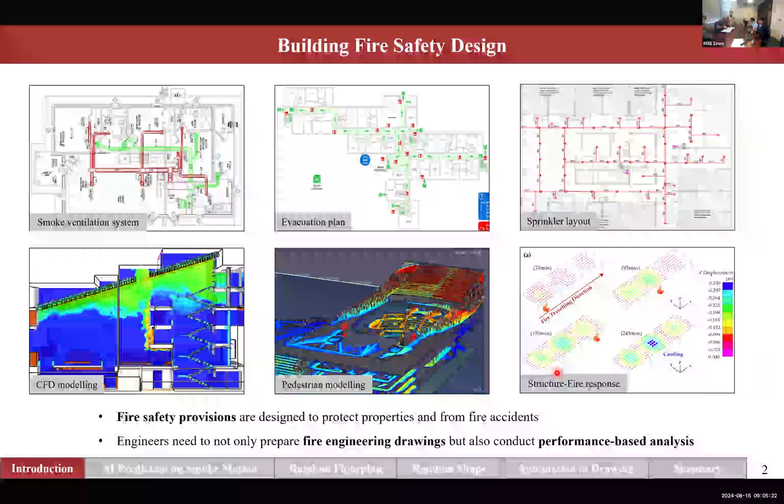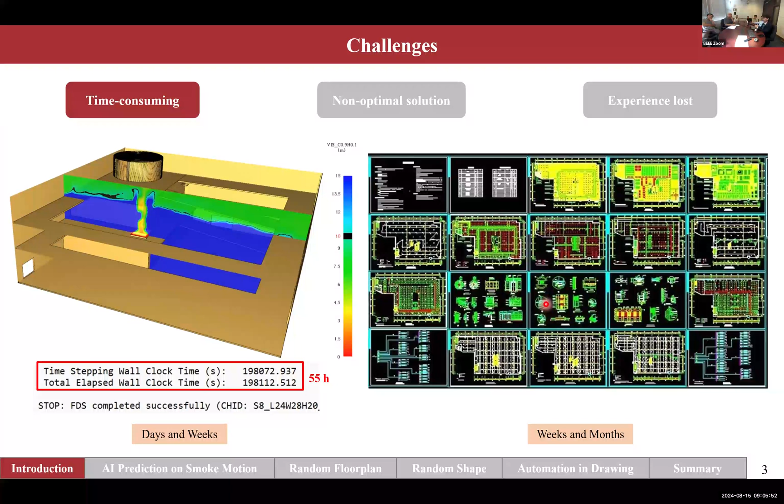So far, there are a lot of advanced computational tools which can help us to conduct the design process. However, there are still a lot of challenges. The first and foremost is that the current design stages are very time consuming. For example, if we simulate a fire development of 20 minutes, it may take a few days to get the result, and sometimes even weeks. And it takes even more effort for the engineers to prepare all the sets of fire engineering drawings. Therefore, the current design is extremely time consuming.

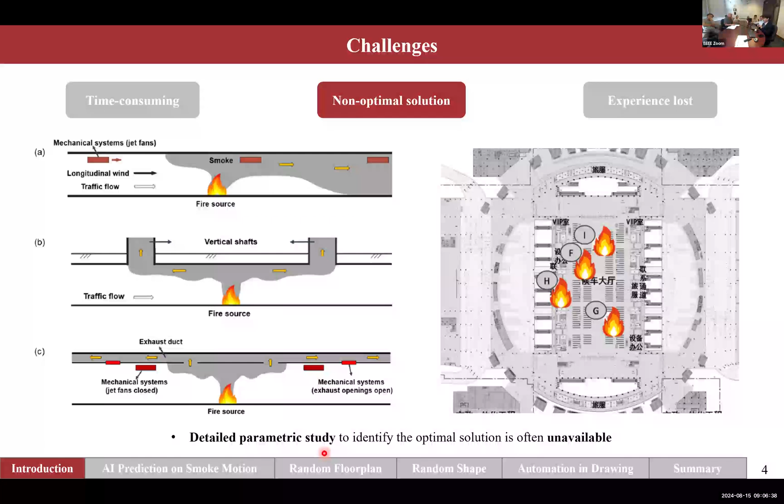And the second challenge is that the fire safety assessment can be affected by many factors. For example, what ventilation strategy has been adopted in our design, or what is the assumption of our fire scenario, like the location of the fire, the heat release rate curve, etc. So there are many factors that can affect the assessment result, but due to the time-consuming nature, in most cases engineers are unable to perform a detailed parametric study and define what could be the optimal and most effective fire safety management for our building. So therefore, most of our designs are not necessarily the best.

And the last challenge is experience loss. You can imagine how many fire simulations are done every year in the world, and how many drawings are prepared. These drawings and simulation data are very valuable. There is much engineering experience and insight inside. But unfortunately, all this data is just singly used. So basically, after we finish one project, all this data just stays in your computer folder, and some of it is never opened again.

And the next time we encounter a new project, even a similar one, we have to go through all this time-consuming design process again. That will cause a lot of repeated workload. And moreover, all the experience and insights are not really shared by the whole fire engineering community. So therefore, we have to train the engineers again and again, generation by generation.

So to address all of these challenges, we are calling for a smarter and more automated design process. And AI could be a promising tool to address these challenges. Basically, the feature of AI is that it can learn from historical data and map the relationships between input and output. And after training, it can provide predictions with intuitive judgment in just seconds. So it has a feature of real-time prediction, and that could potentially help us speed up our design process.

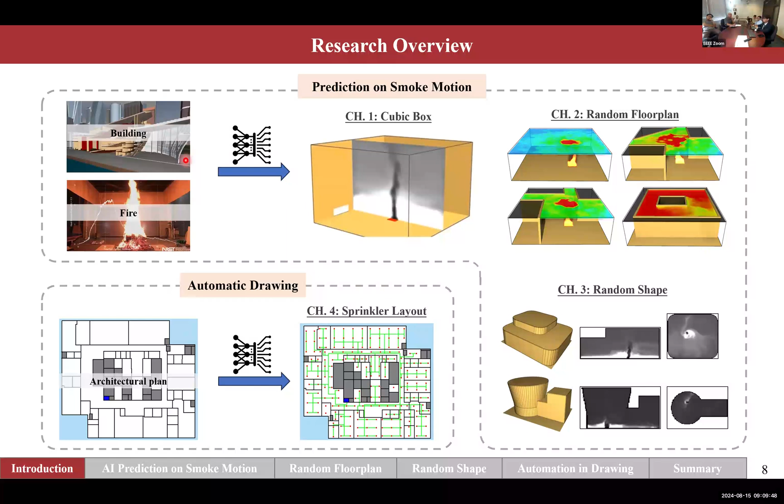In my 3-year PhD period, I have done a total of 4 works, which explore the possibility of using AI in fire engineering design. We start from the prediction of smoke motion, which is very important for performance-based analysis. In my first work, we tried to see if AI can predict the smoke movement and smoke layer descending process in a cubic shaped atrium. After that, we upgraded our AI model to address rooms that have different floor plans. In the third work, we further upgraded our AI model to see if AI can make predictions for random building shapes. And in my last work, we explore whether AI can help us prepare the fire engineering drawings. So that is the overview of my research.

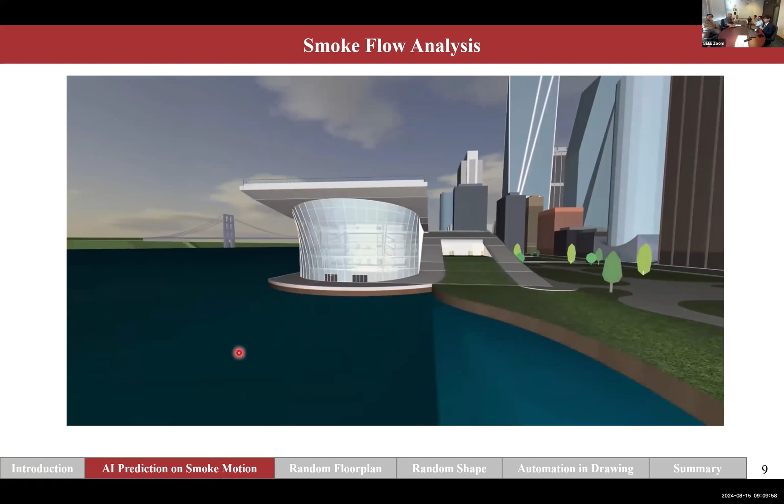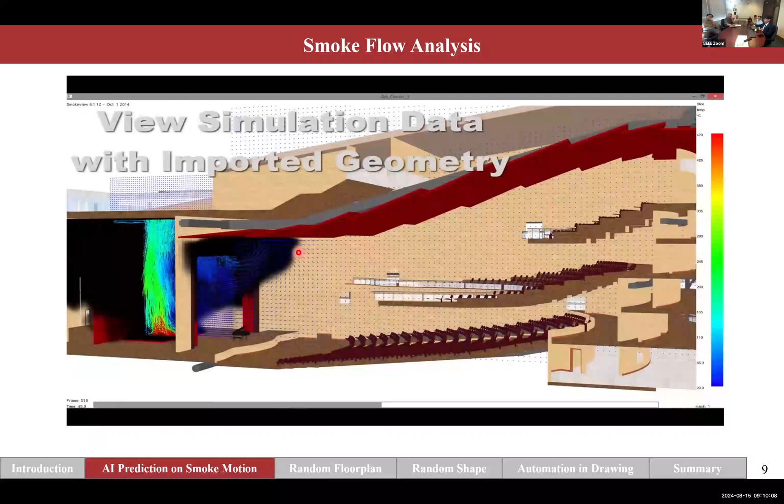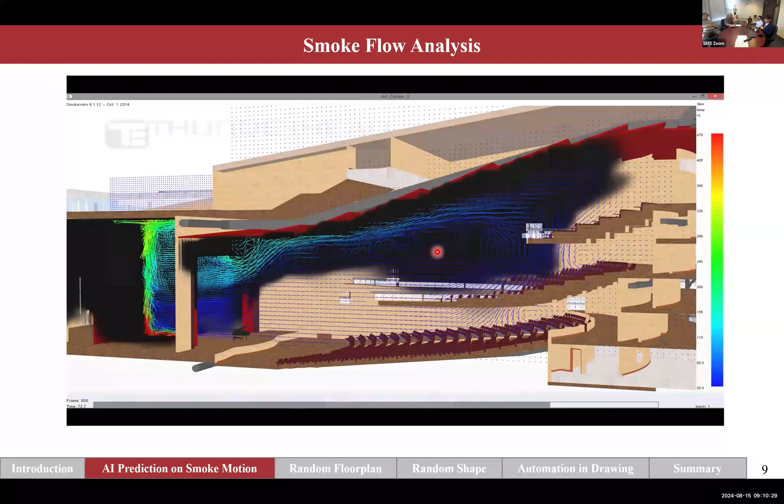And now let's dive into the first one. When we design a building, as designers and engineers, we wonder what would happen if a fire occurs in the building, like how fast the smoke will spread and how high the temperature will rise, etc. That kind of process today can be modeled by advanced CFD modeling, such as FDS, Fire Dynamics Simulator. However, as I mentioned before, these computational tools are very time consuming in terms of simulation time.

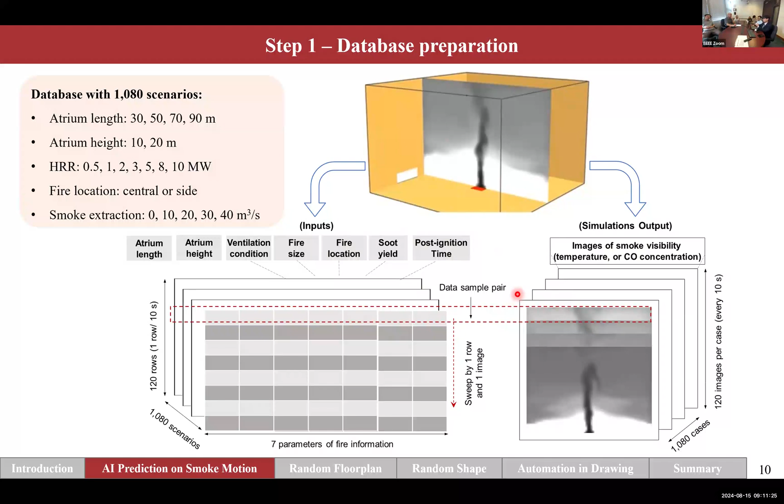And back 3 years ago, we were trying to see if AI can speed up the process. At that time, we had no experience and were not confident whether AI could really make accurate predictions. So we started with a very simple geometry, just a cubic shaped atrium. But we still established a very extensive database with over 1,000 fire scenarios, which cover different atrium dimensions, heat release rates, fire locations, and ventilation capacities. Basically, we labeled all the design inputs with smoke images, including the visibility, temperature, and CO concentration at specific time steps, and tried to see if AI can get the relationship between them.

So the specific AI model we used here is called TCNN, the Transpose Convolutional Neural Network, because we are trying to make a translation from 7 design parameters into an image. So basically, it was a very typical upsampling task which the TCNN can perfectly address.

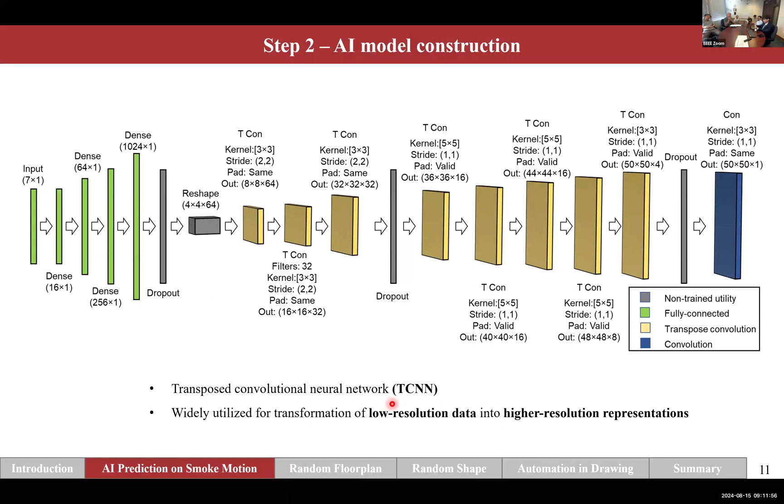And after training, we're asking AI to make predictions for some new cases. So here is a very typical case we selected from the testing data set. The first row is the prediction of smoke movement by the CFD, and the second row is the AI prediction. We also present the visibility, temperature, and CO concentration results, and they are presented in video format.

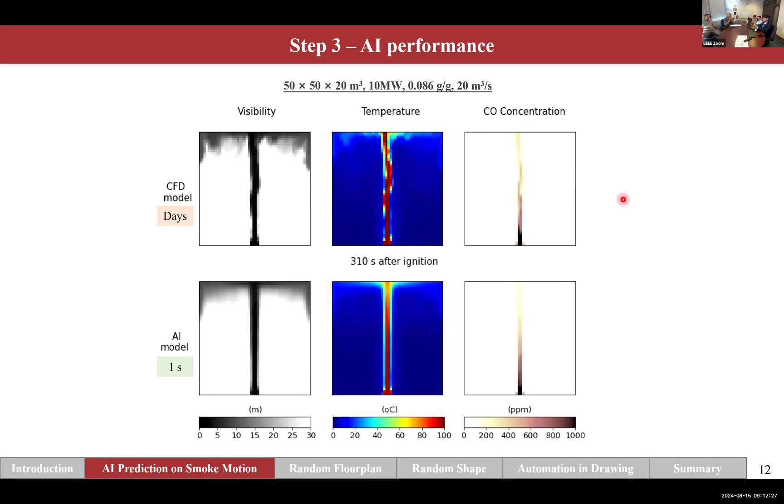So basically, you can have an overall impression of how similar or comparable the AI result can be to the CFD. And again, CFD may take a few days to get such a result, and AI just 1 second, 1 click. We're also trying to see more results. So we found a benchmark case, again from the testing dataset, and we tried to apply different soot yield, heat rate, atrium height, etc.

And what we feel is that the AI just works like a non-linear fitting of all the input parameters to the output. Basically, if it has seen the case with a 10-meter height and 20-meter height before, it can give a fitting result with 12 and 15 meters. So with this real-time feature, as engineers, we can perform very detailed parametric studies.

And to further showcase the capability of AI, we developed a software which we named the Intelligent Fire Engineering Tool, IFE tool. And we also made it open access on the internet. So let me just open the, yeah, I just wonder if you can see my webpage.

So basically in this interface, what a designer or engineer does is just fill in all the information about the building and fire. For example, we have a building with 49 meter width, height perhaps 17. I just type them randomly here. Fire size perhaps 4.5. We got the fire inside near the wall. Soot yield perhaps 0.07. We have ventilation capacity of, let's say, 25. Smoke clear height, let's say 3 meters, and just one click.

Then you can get all your results, the smoke images. You can also check what the smoke development could be at perhaps 20, 200, or 500 seconds. And you also have the smoke descending profile, which can be compared with your predefined smoke clear height. Then you can have the available safe egress time, which is quite an important parameter when we're doing the design assessment. You can also check other tenability criteria like temperature as well.

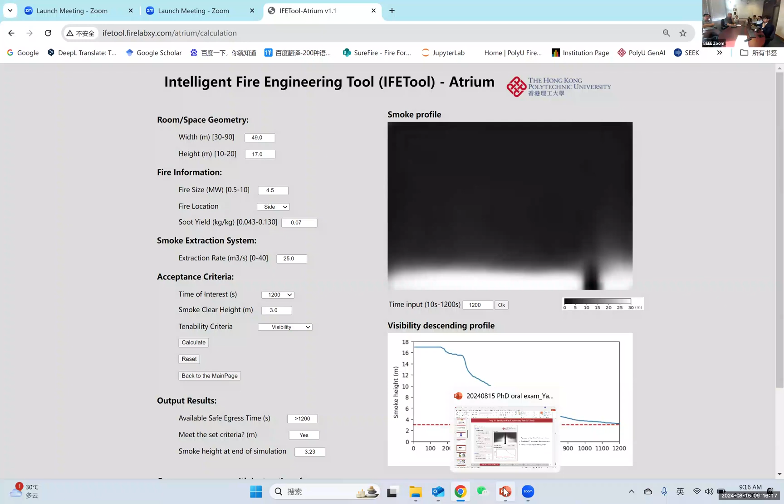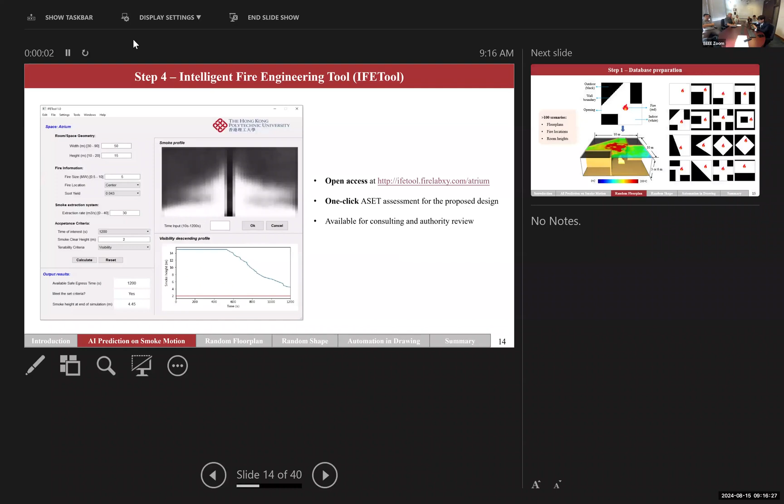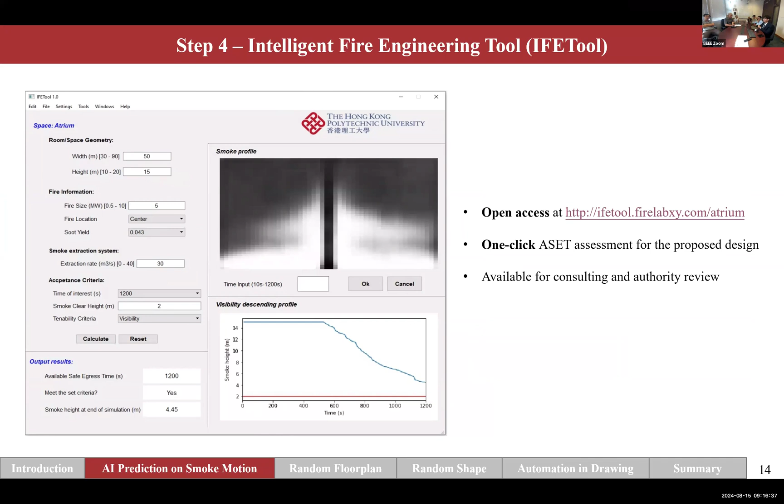And of course, with this successful try, we have our second work, where we are trying to see if AI can make predictions of fire in different rooms or rooms with different floor plans. So here we labeled the room floor plan with an image, where the white area is the indoor room area, and the black area is the outdoor area.

So we put our floor plan in this kind of image, and the right side shows some examples of our database. So basically, we built all different kinds of shapes like L shape, corridor, T shape, cross shape, etc. And also we have the triangle corner or enclosed rooms, etc. So basically, we have over 100 fire scenarios and feed all this data for AI to learn.

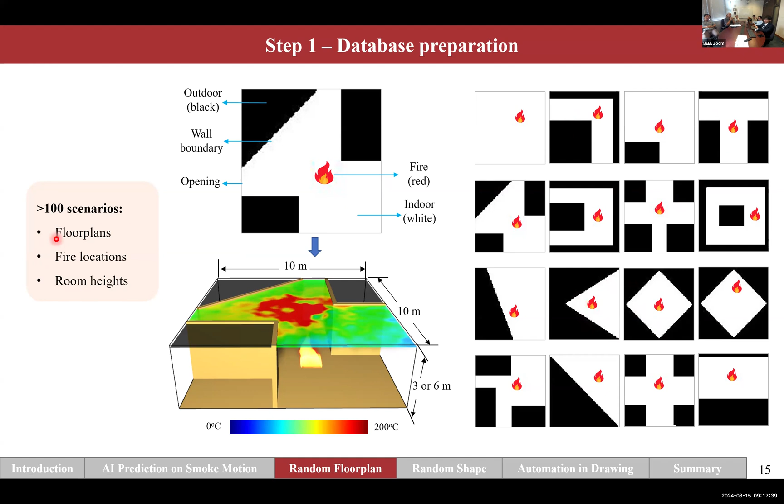So basically, for the AI model construction, the input in this work is, of course, the floor plan of the building, of the room, and also the location of the fire, and also the heat release rate curve of the fire. So we feed it to the GAN model, which is very famous for its outstanding performance in image generation. And the output would be the temperature, velocity, and soot density fields under the ceiling.

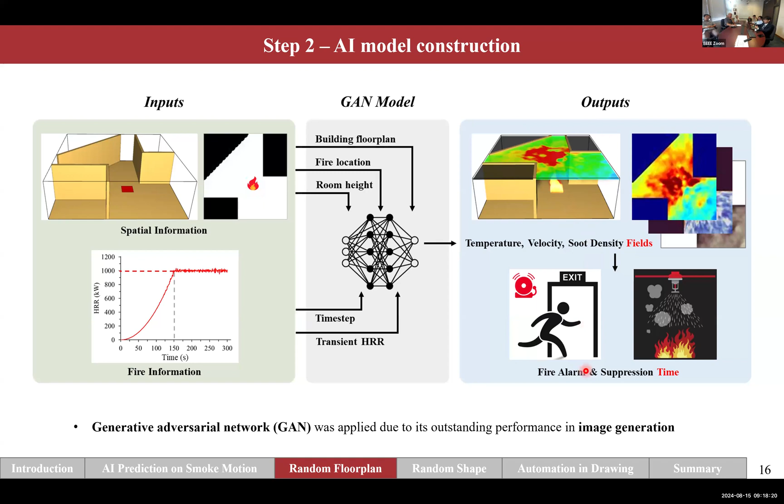And with all this result, we can conduct a performance-based analysis in terms of fire detection time, which I will mention later. So basically, this is a demonstration of our AI result. And we select 3 typical cases. One is the open floor scenario, which means there are no surrounding walls. The second one is semi-open with both walls and openings to the surroundings. And the third one is a totally enclosed scenario.

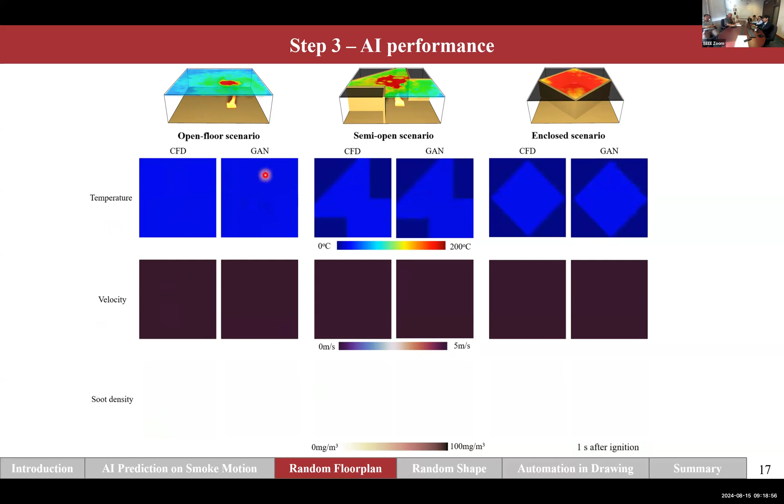So we have a result presented with temperature, velocity, and soot density. And for each case, the left side is the CFD result, and the right side is the GAN result. So basically, we can still find a good agreement between CFD and GAN. And again, CFD takes a few days to get that, while GAN just a few seconds.

And with all these ceiling fields, we can do a detailed fire detection analysis because most of the sprinklers or detectors are installed under the ceiling. And once a fire happened, if we have an accurate estimation of the velocity or the gas temperature of the smoke layer, we can make prediction for the detector activation time, which is quite important for not only the design assessment, but also the sprinkler placement and fire investigation.

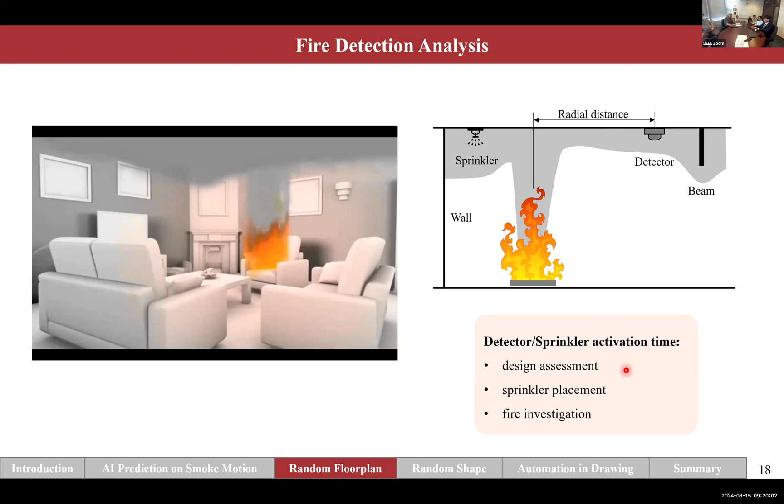So one case study is that if we got this kind of fire case and we know where the detector is located, we can plot the curve of the temperature and the velocity rise with the time. So in the plots, the gray lines are the CFD result, where you can see a very severe fluctuation, and the black lines are the GAN result, which is aligned to the CFD result. And for the predicted detection time, we can achieve accuracy of 95% on average.

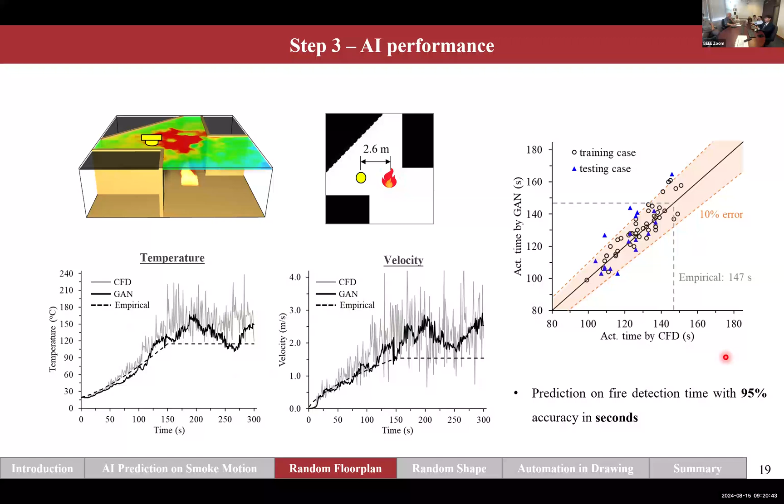So that could be another successful try and give us the confidence to take a further step, addressing the 3D-based prediction, because we know modern buildings have all different irregular and innovative building shapes. We are trying to see if AI can make predictions for the random building shapes.

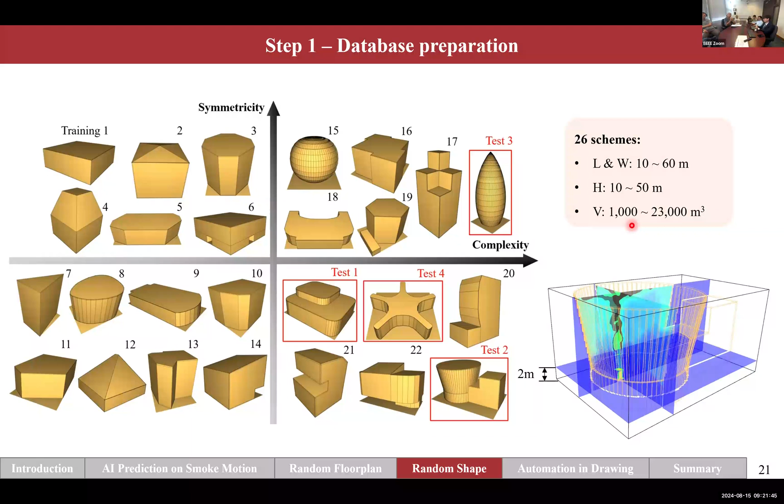And to achieve that, we, of course, go back to the very first step to prepare enough database. So we have basically the atrium designs with different shapes, and ask AI to learn how the fire and smoke can spread in all these different geometries. The volume of our database ranges from 1,000 cubic meters to 23,000. So for the AI model construction, the input of our AI is, of course, the shape of the building and also the location of the fire.

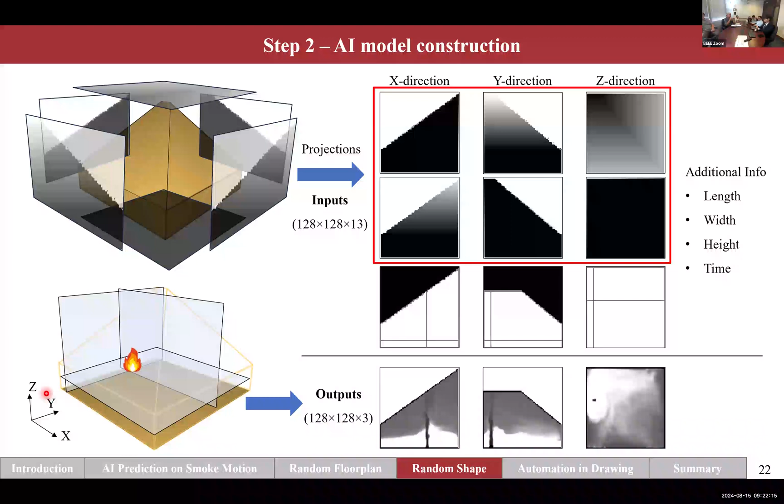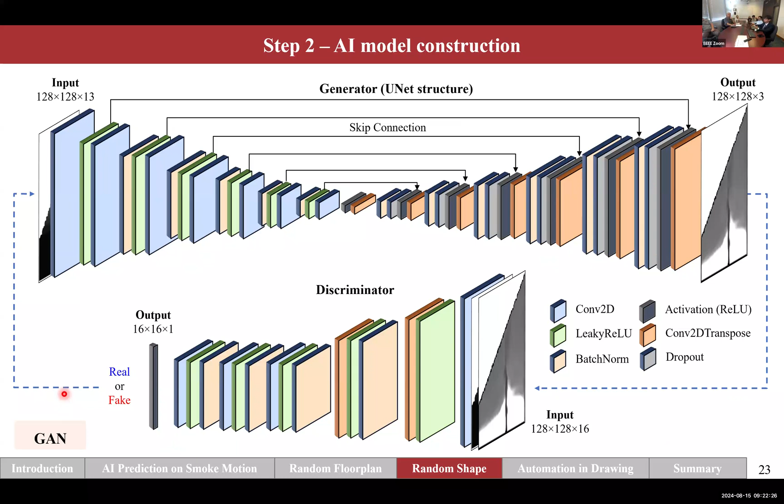And the output here, we just use 3 visibility slices from the X, Y, and Z directions. For the X and Y slices, they are the slices across the fire center. And for the Z slice, it is 2 meters above the floor. The specific model we adopted, again, is a GAN model due to its good prediction in our previous study. And this time we also adopt another advanced AI algorithm, which is called diffusion model, and we can compare the results as well.

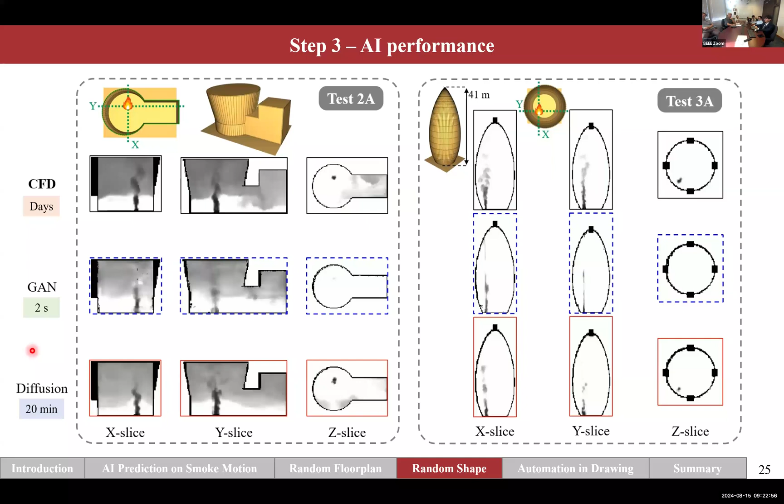So after the training, again, we select some new cases and ask AI to make prediction. The first row are the CFD results, second are the GAN results, and the third is the diffusion result. So after a lot of rounds of fine tuning, we finally got models that can give us good results, especially the diffusion model. As you can see, it can even reproduce the fluctuated fire plume, all these flow details. Instead, the GAN may not produce all these flow details, but it has its own advantage of faster computational time.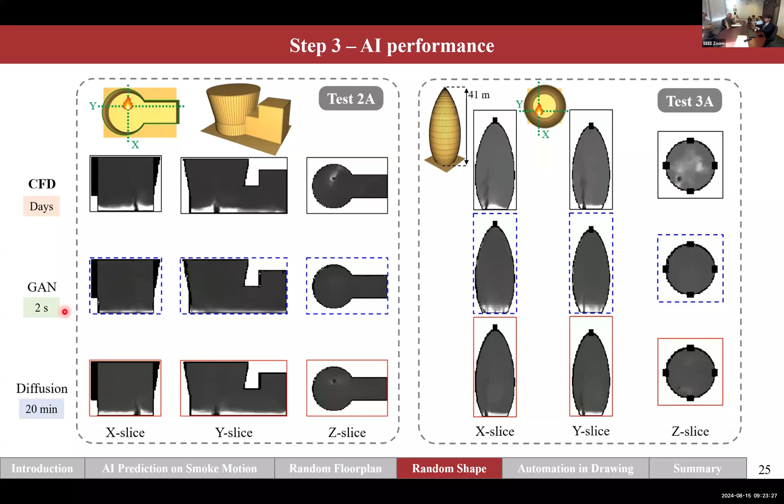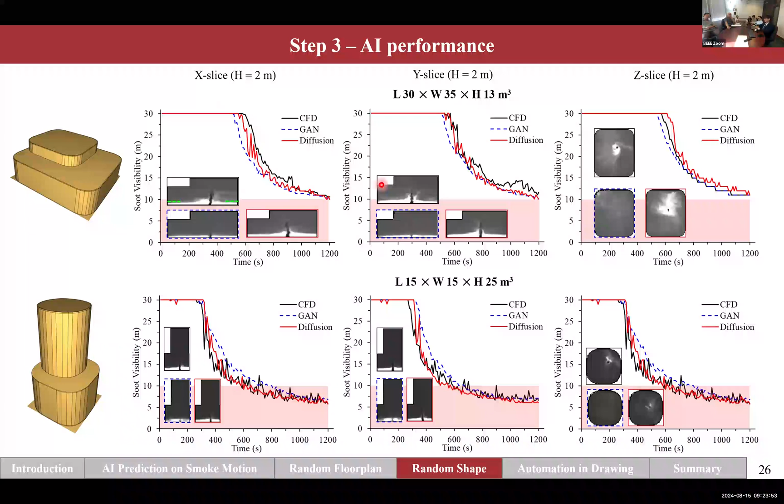And we're also presenting results for other testing cases here. For this plot, the x-axis is again the simulation time, and the y-axis is the soot visibility at the height of 2 meters. The black curves are the CFD result, and colorful curves are the AI. And we can see they still have good agreements here. But unfortunately, not all the results are that promising.

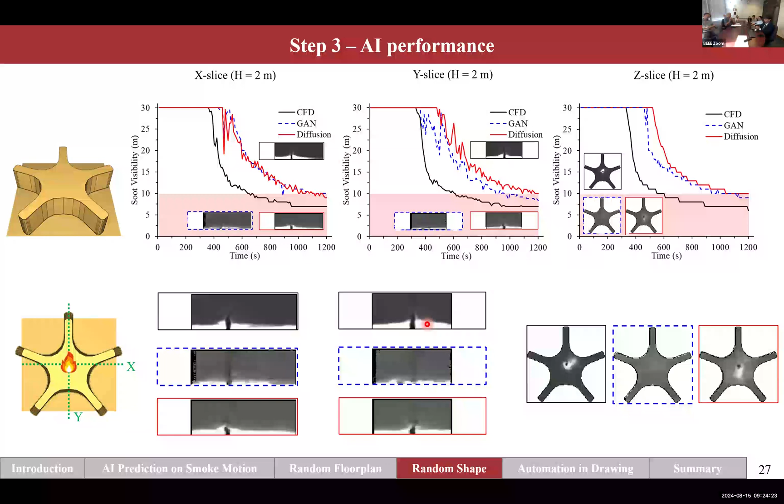For example, for this last testing case with a unique star shape, as you can see in the curves, there are discrepancies between CFD and AI. And from the videos, you can still see a significant time delay for the AI result in terms of the smoke descending. One potential reason we believe is that if we go back to the database, we can see this testing case is very distinct from other cases.

And as I said before, the AI does things based on intuition, based on experience, instead of the physical laws. So if it hasn't seen a similar case before, then it may not provide a good prediction. So that could be the issue. But as you can see, we just have a very small database with over 20 training cases in this work, but it can still give good results, at least in 3 different testing cases.

So just imagine what if we have a training data with 100, 500, or even 1,000 buildings with different shapes, then the AI could be very powerful. But still, it gives a warning for us that we have to be well aware of the limitation of AI. And every time when we use the AI to make a prediction, we have to check the range of the database so that we can really give the prediction result with confidence.

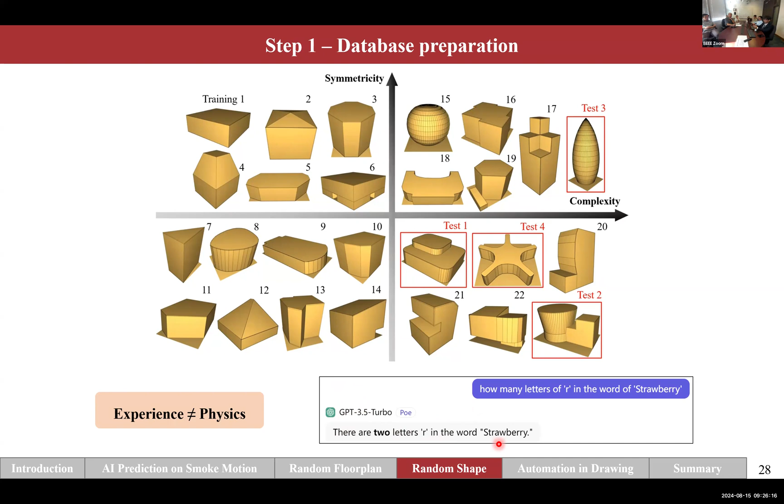So that is unavoidable. For example, even the powerful ChatGPT can make very simple mistakes, like wrong counting of the letter R in the word strawberry. So what we want to emphasize is that we don't want to say that AI is perfect and can solve everything in a simple way. But instead, we have to be well aware of its limitation for better utilization. So that's basically all our efforts on the AI prediction of the smoke motion.

And in my last work, we are addressing the drawing preparation task. So nowadays, it relies on the engineers to conduct all the engineering drawings from the architectural plans. However, we want to automate this process. So we propose an intelligent workflow, which starts from the information filter, because after an engineer receives the architectural plan, there is so much information there. We have to remove unnecessary information first, because it is all noise during the AI training process.

And we just keep the key information and encode it into a format of a picture or a matrix, because AI can only read numbers. They cannot know what a CAD file looks like. So basically, what we expect is that if we feed this architectural input to the AI, it can help us to do all the fire engineering designs. For example, the sprinkler placement.

And since all the input and output are in the format of numbers, it will be very convenient for us to perform some code compliance checking. For example, counting the numbers, counting the length, measuring the distance or areas, etc. And after the compliance checking, the engineers may manually make corrections to the design. And after that, we can post-process it into CAD drawings, for example. So that is the proposed workflow for our intelligent design.

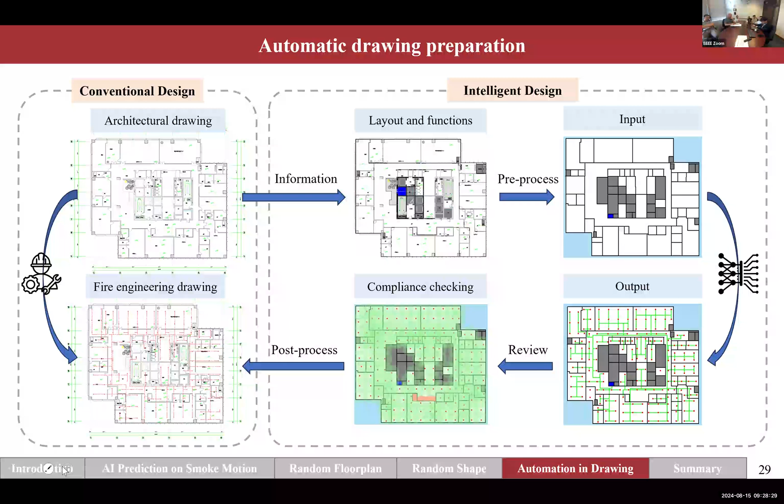And in this work, oh, sorry, my PowerPoint is stuck. Okay.

In this work, to verify our proposed method, we did a case study of sprinkler layout design, where the engineers are responsible to provide the placement of all the sprinkler heads, which we labeled in red, and also connect them by pipes, which we labeled in green. And for the input architectural plan, we made the information filtering and pre-processing. All the spaces, such as the office rooms or the corridors, are presented in white. Other rooms that require no sprinkler installation, for example, elevator shafts and electrical rooms, are labeled in gray. And we also label the riser shaft in blue, where the pipes should come from.

And another prior information we should have is the fire hazard class of our building. Because basically all of the fire regulations and fire codes divide buildings into different fire hazard classes based on their occupancy. For example, if it is an office or shopping mall, etc., then they will specify the spacing requirements between the sprinklers. So that could be very important prior information for the AI.

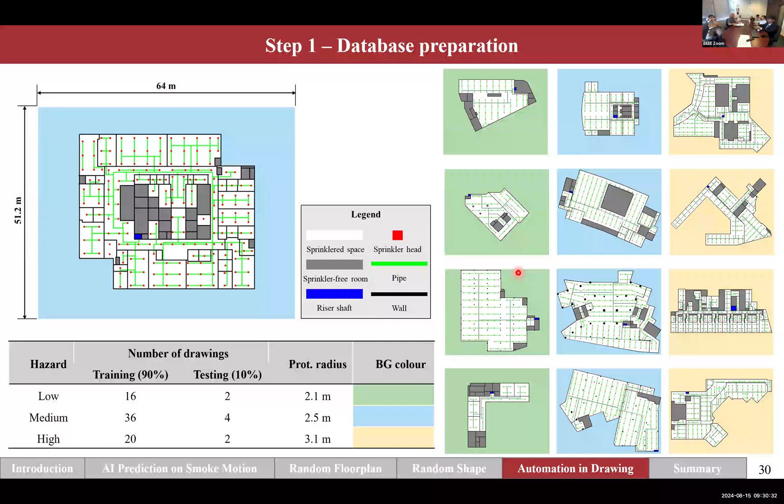And the right side is some examples of our database. Basically, we collected a total of 80 CAD drawings. It's not that much, but it's the best we can do, because most of the parties, like the design institutes, are not willing to share their drawings. So still, we are conducting the training.

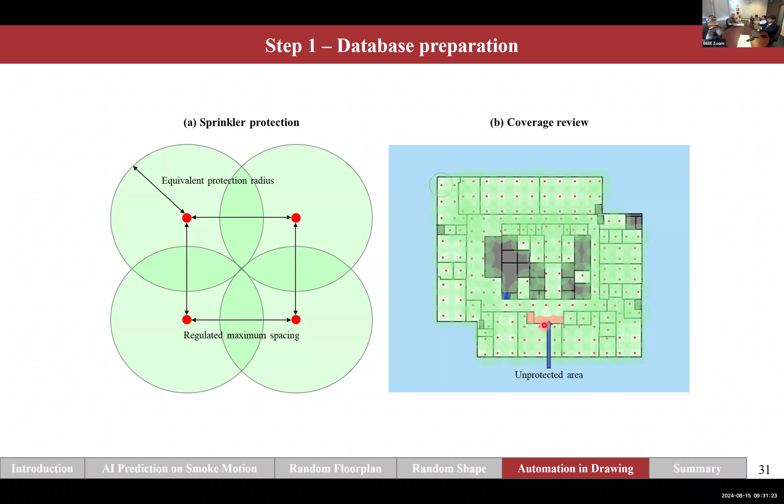Before the training, for the sprinkler layout design, as I said before, most of the codes specify the maximum spacing between the sprinklers. But in practice, it's very hard for engineers to do the design review based on the spacing requirements. So a more convenient, more commonly used way is transforming this spacing requirement into an equivalent protection radius. Then we can draw the protection area for each sprinkler, and we know which areas are not really protected. And we can highlight them so that engineers can make design corrections quickly and conveniently.

So for the construction of the AI model, the input would be the architectural plan and the hazard class. The AI model we adopted again is the GAN model. And then we expect AI to give the sprinkler placement as well as the pipeline connections. We add it to the background and do the result evaluation. And that is the whole process of our AI model.

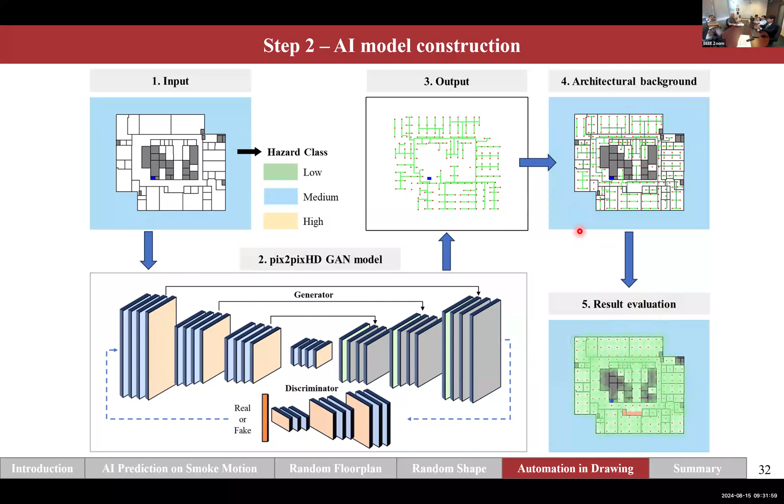Here are some examples of our results. We present two cases with the same outline and different interior floor plans. For engineers, it takes on average 21 minutes to place all the sprinklers. And for AI, again, it just spent 10 seconds.

And if we look at the numbers for the coverage rate as well as the total number of sprinkler heads, the AI design could be very comparable to our engineer. But if we look at the result in more details, we can still see a lot of flaws in the AI. For example, the repeated sprinkler placement in the small area. And also some of them could be better if they can be placed in a straight line so that the system can be more well organized.

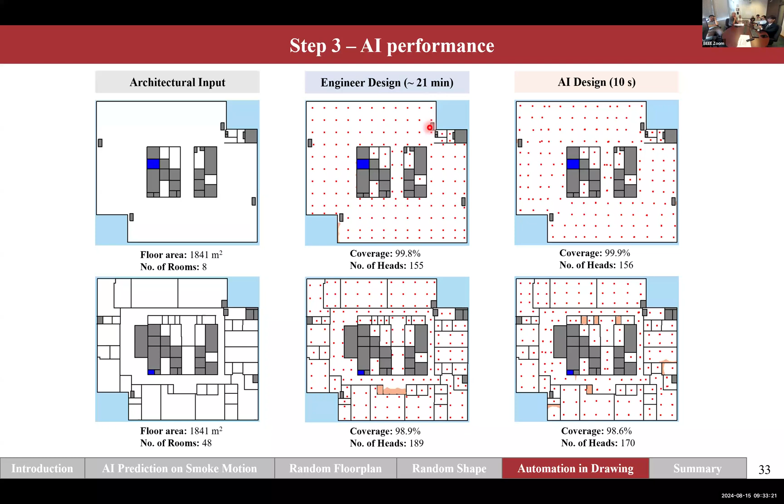And based on the estimation of engineer, they can spend about 5 to 10 minutes to make corrections based on the AI preliminary result. But still, it was a significant improvement for our design efficiency comparing to the traditional one.

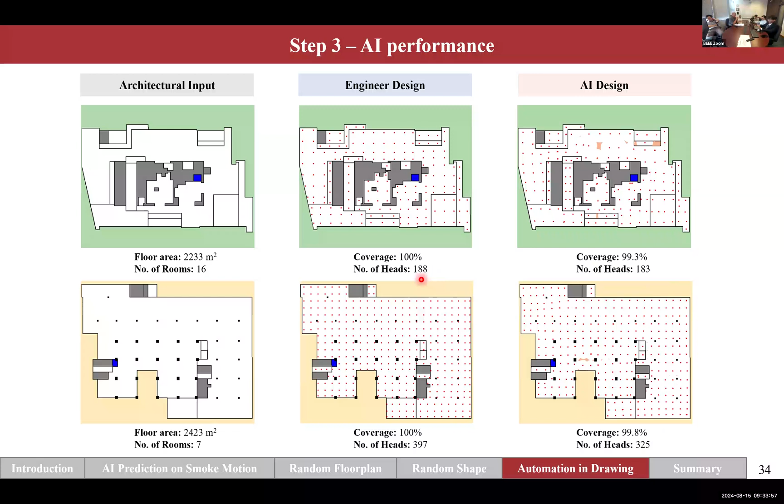Here are more results with different hazard classes of low and high classes. You can see the AI can really adopt the spacing requirement. For high class ones, it can place the sprinklers more densely, while the low hazard ones got larger spacing. And for the coverage rate, all of them can be up to 99%. And the number of heads are also comparable to engineer.

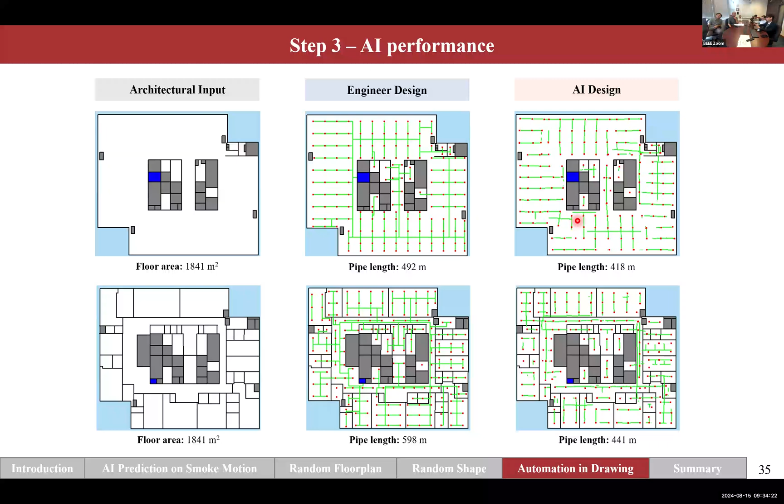So now let's look at the result of pipeline connection. So basically, again, this one is not that promising. If you look at them, there are a lot of disconnections in the pipelines by AI, as well as double or repeated connections. So basically, it's far away from the standard quality that we required.

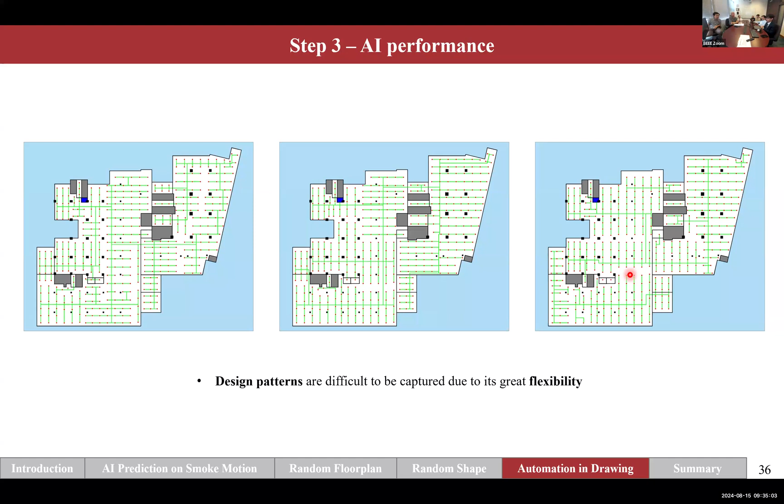And one possible reason we believe is that unlike the sprinkler placement, which has a very specific spacing requirement, the pipeline connections have a larger design flexibility. For example, for the same sprinkler placement, we have at least 3 or even more different ways to make the connections. So this kind of design flexibility makes AI harder to capture all the design rules and patterns. So that's what we are still working on and trying to improve in the future works.

So that's basically all the 4 works I have done in my PhD period. And to summarize the contribution, we have to go back to the very first 3 challenges of the current design process. And we believe if we adopt the AI method, we can achieve a quicker and real-time prediction or generation of the design outcomes, which can significantly improve the design efficiency and reduce the cost. And with this faster prediction, we can also do a lot of detailed parametric studies of our design, and it makes it easier to identify the optimal solution for our design.

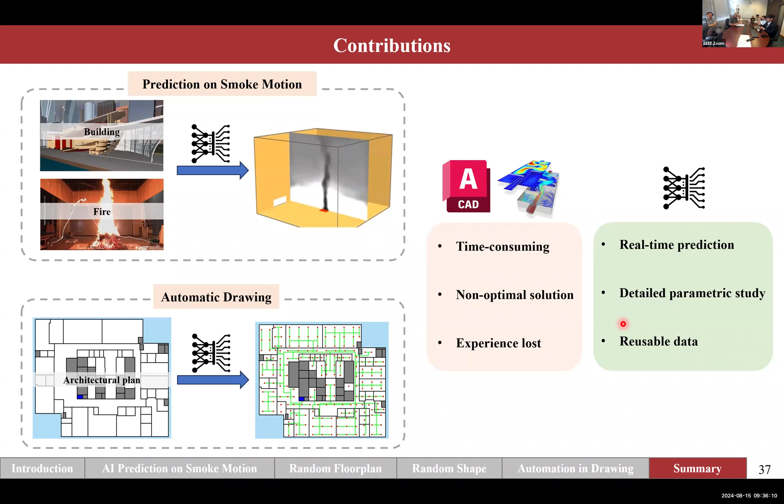And more importantly, all the past design experience and data could be reusable. So if our database can be extended to a certain degree, the AI could be very powerful. And of course, I think we are the first team which applied the AI method in the building fire safety design worldwide.

And of course, there are a lot of limitations, and there are a lot of future works we can still improve. So basically, from the database point of view, this method we believe can be not only adopted in the atrium, it can be also applied to other facilities like tunnels, underground space, etc. So the tunnel is the project we are working on now in our team. And we are also trying to see if the AI can mimic the human evacuation process as well.

From the AI model construction point of view, so far, all the AI models I have used in these studies are purely data-driven, which means the accuracy of the results heavily depends on the data quality. If we have no high quality data, we cannot get accurate result. So to overcome that, one way is to add some physical laws or rules or attentions in our AI training process. It can make our AI result more controllable and more explainable. So basically, that's a very good way we are trying to improve our AI model.